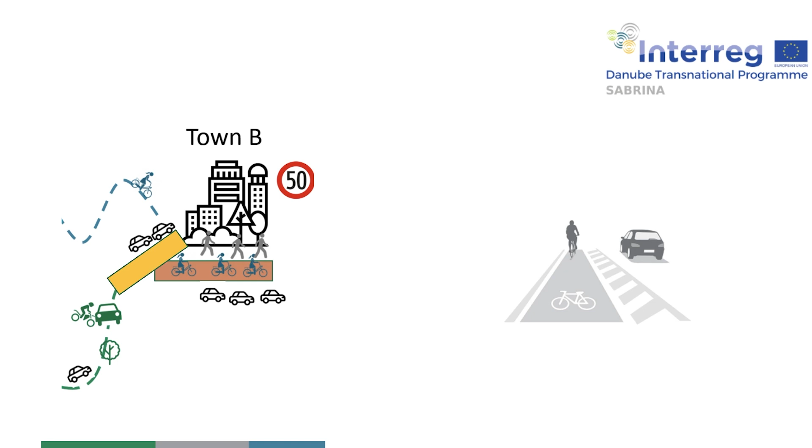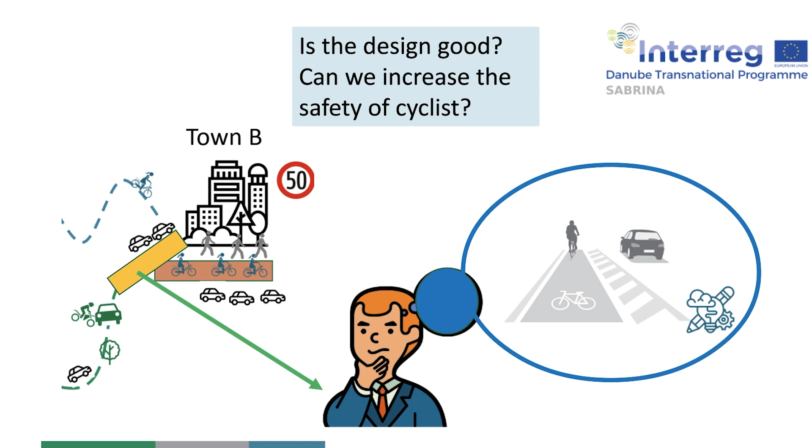We also plan to build here the separated bicycle path, and we have a design for this. And the question is, is this design good? Can we increase the safety of cyclists with this design? So these are very important questions. And to answer them, we have a solution. In SABRINA, in Work Package 3, we have developed a Safer Cycling Routes Toolkit. And here you can see the first page of SCRT online. And here is one of the pages of instructions on how to use this amazing SCRT.

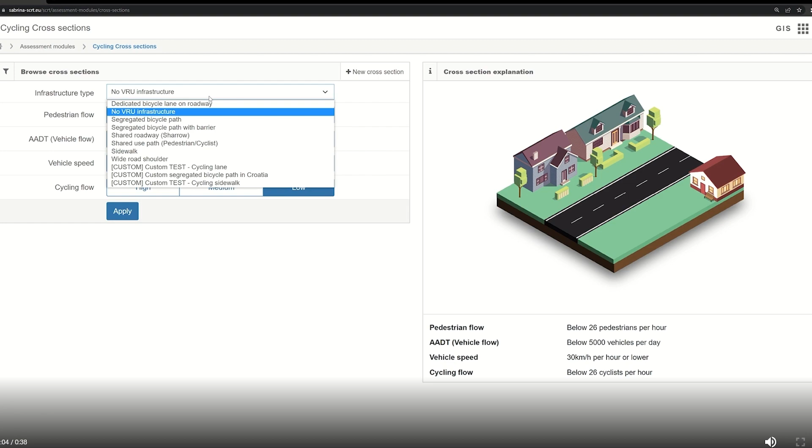The assessment modules are something that you will use when you actually assess your routes, and there are five of these. I will cover them in the order in which you should also use them when you actually try to assess your routes. So the first one is cycling cross sections. Here, if you saw the SABRINA Experience booth over there, you can select some of the infrastructure types which are being assessed by CycleRAP and iRAP methodologies. It's eight of them. You can also define some of your custom cross sections.

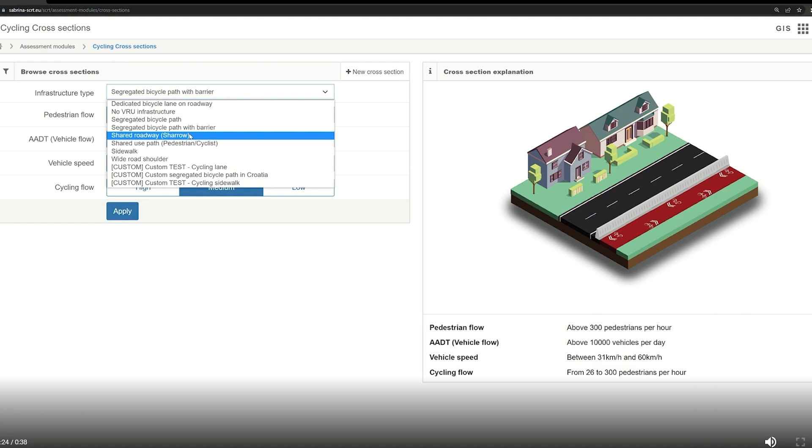You can select the flows that are going to be happening on the infrastructure type that you selected. So pedestrian flows, AADT, which is the average annual daily traffic on the road, and cycling flows. You also select the speed ranges, you click apply, and you get the results. The basic results that you should focus on are, of course, the iRAP star rating and the CycleRAP risk scores, but there are some other things that you can browse through.

So you can also browse the costs, the reduction potential or the crash modification factor that was used for a certain infrastructure, and the safety scores, which is a sum of all accident scores from iRAP and CycleRAP methodologies. Regarding this number, the lower the number, the safer the infrastructure. For example, for this infrastructure here, we have a safety score of 11. That's safe, I would say. You can also see what you actually coded regarding the pedestrian flows, cycling flows, and so on.

What is important here is that when you browse these cross sections, this is actually the repository of all available cross sections that the toolkit uses when you are applying them on your routes. When you create your own here, you are the only one that can actually see it, and it will have a custom prefix. You can edit a lot of parameters.

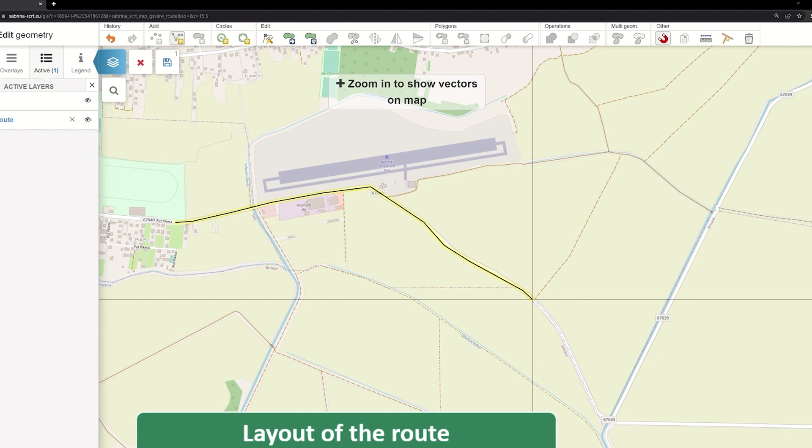Let us move on to the other module that's really important and kind of mandatory if you want to assess your routes, which is the GIS module. Within the GIS module, you need to do three basic things. First, you need to actually draw the route, so you need to make the layout of your route, as you can see in the video. Then you need to split the route every time significant infrastructure or flow changes. For this example route, I have split it three times from the data I had available. No infrastructure change, but some flows did change.

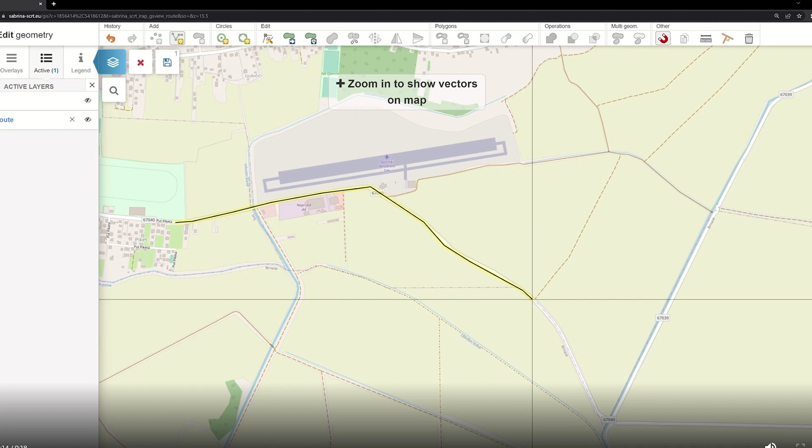And you can also add ECS attributes on the route. You can see me adding, I believe this was a survey point attraction attribute. I wanted to add some cultural heritages, for example, so we can see how it is being assessed later on. This part is optional though, so if you're familiar with the ECS, you can use it and you can get some results on the presence of these attributes on your route later on.

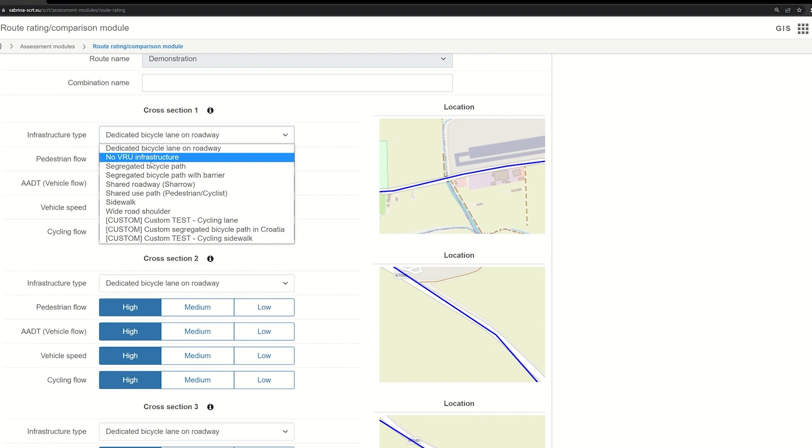This is basically the route rating module. After you select the route that you did, same as within the cycling cross sections, you just add the flows, the infrastructure, and so on. I'm not clicking on it in the demonstration video, but if you click on the i icon over here, you will actually get the image and what has actually been coded within the individual cross-section. You can click apply and save route, which I didn't do here, because if you click view, you can very quickly get the results.

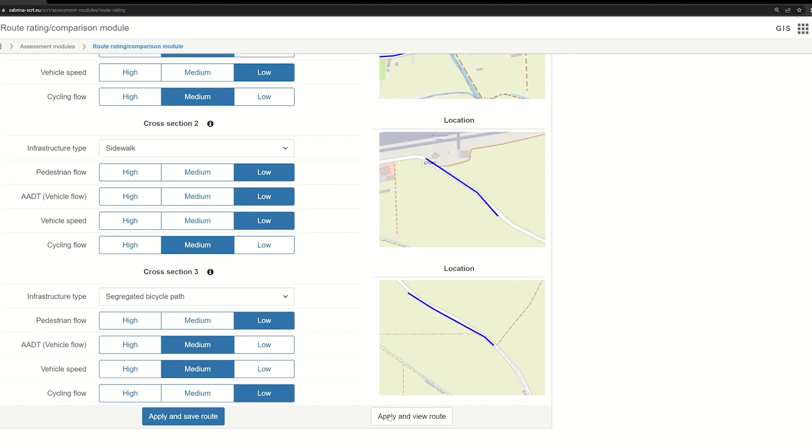So what can we see here? You can see the cost, which is the approximation of the currently coded infrastructure on this road. You can see the average IRAP score estimation for the route. On the route that I defined, you can see that this route has scored 4 stars on 0.9 kilometers, and you can also see that it scored the same percentage on the other 0.9 kilometers. After that, you can go to the CycleRAP score average and see that the medium risk is present on 72% of the route, and the low risk is present on 28% of your route.

You can see some other statistics that you entered during your layout infrastructure defining phase. So you can see for your route where the vehicle flow is present and in what percentages. You can also see any ECS attributes that you coded here. They will just be added dynamically. And you can also see what cross sections have been added in what percentages of the route here. This is basically the results of the route rating module.

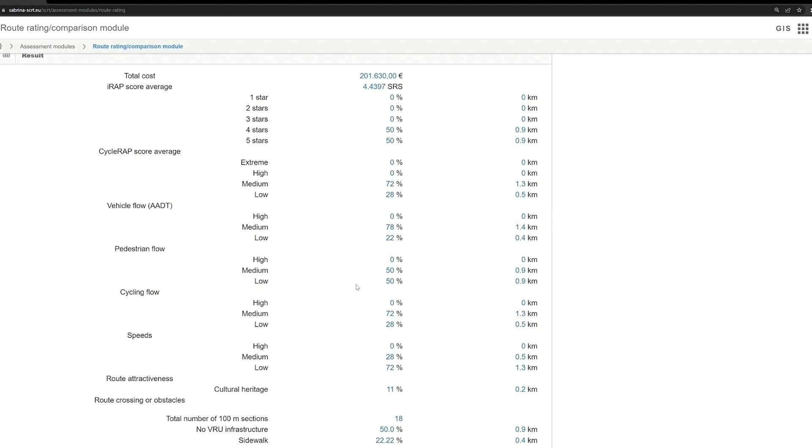You can also compare any of the routes that you save within the module, but just because I don't think there is enough time, I skip that part. So if you're interested in that, you can find me at the SABRINA booth later.

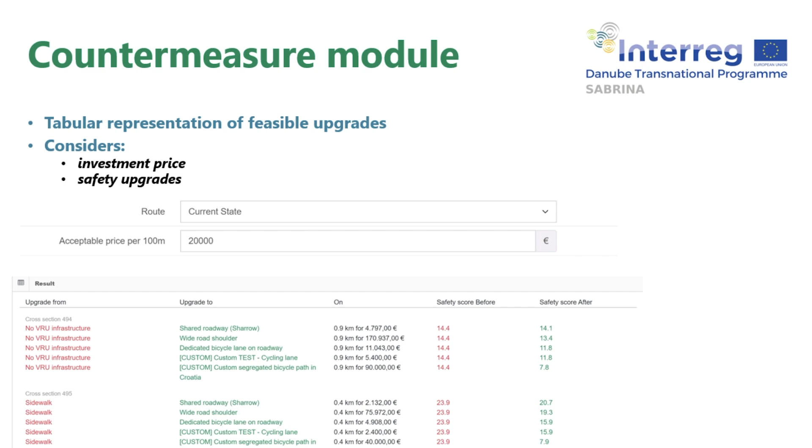Okay, let's go to the other module, which is the countermeasure module. Within this module, the only thing that you need to input on the route that you previously saved is the acceptable price or the investment price. You just need to divide it per 100 meters of your route, and the module will give you a very simple results table of what you can actually build on these cross sections while taking this price into account. And you can see that for my route there are multiple alternatives here.

For the first cross section, which was attributed as no vulnerable road user infrastructure at all, the module has suggested that I build a shared roadway or a sharrow for 4,000 euros or almost 5, a wide road shoulder for this amount, a dedicated bicycle lane on a roadway for this amount, and also my custom cross sections that I defined were taken into account. And you can also see that only the first two cross sections were suggested, because the third one was actually coded as a segregated bicycle path, so the module for this price did not find any viable upgrades.

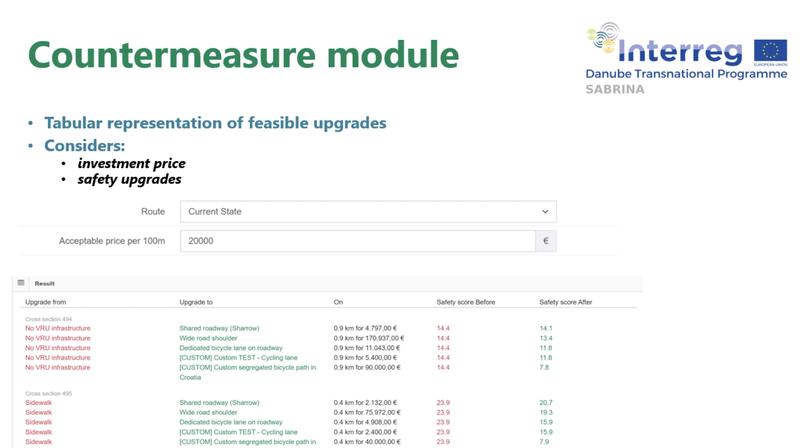You can also define the analysis period of the benefit to cost ratio analysis, and something that IRAP uses is 20 years, so this is a number that we would also recommend that you use. Then you can also add a discount rate.

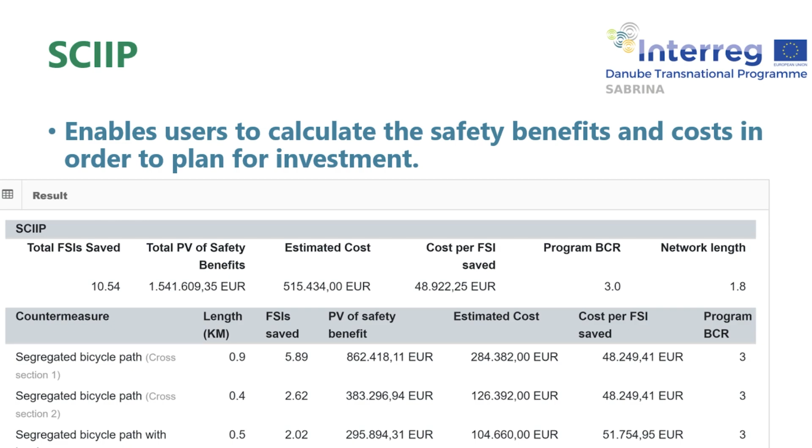Here you can see the benefits for the route. You can see the estimated cost of construction. You can see the cost per each fatal and serious injury that is predicted to be saved. You can see the program benefit to cost ratio, and here you can see the network length. The table below shows this only by each cross section that is being assessed within the module. So quite handy.

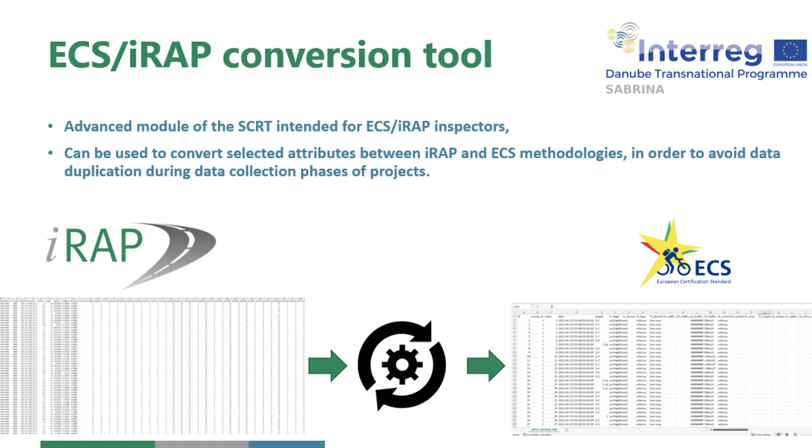And let's move on to the last part of the tool, which is a conversion tool, iRAP to ECS conversion tool, to be more precise. So this is an advanced module of our toolkit, and it is intended for trained ECS or iRAP inspectors. You use this tool to convert selected attributes between iRAP and ECS methodologies. So when you are assessing both, you use this tool to avoid data duplication. So you do not need to check for AADTs and some other stuff 2 times. It will just be entered automatically for you within the tool. And this is what our tool is all about.

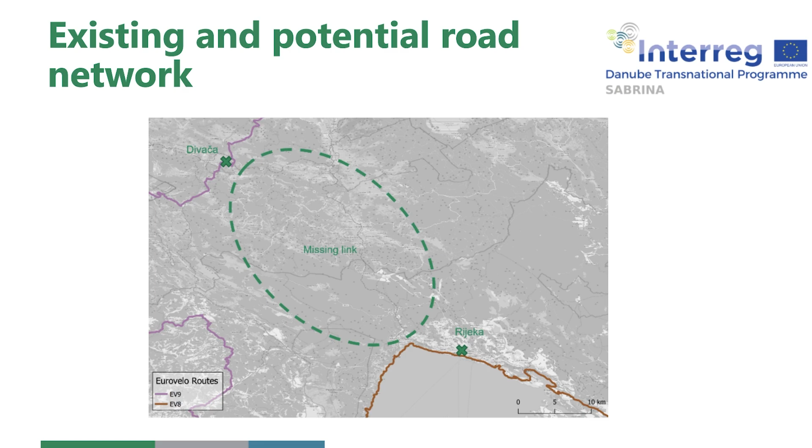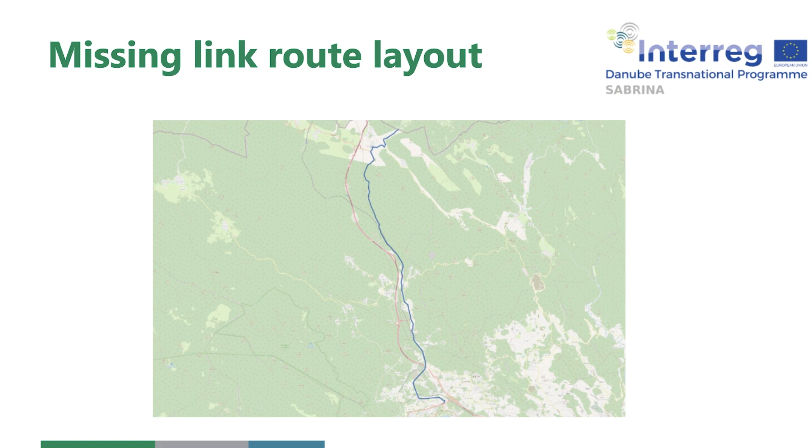He said that every 2 years the routes are being redrawn. So one of the options was also to connect Matulji and Divača in order not to force cyclists to do the entire trip around the Istrian peninsula and take the EuroVelo 8 route. So basically this is the route layout. It's a state road which is right in parallel to a motorway. It's about 17 kilometers in length.

The data collection process was quite straightforward, so we contacted the Ministry of Interior for the accident database. There were no cycling-related fatalities reported, fortunately. We also collected traffic flows and speed data. Croatian Roads make a publication every year where they summarize the ADT data.

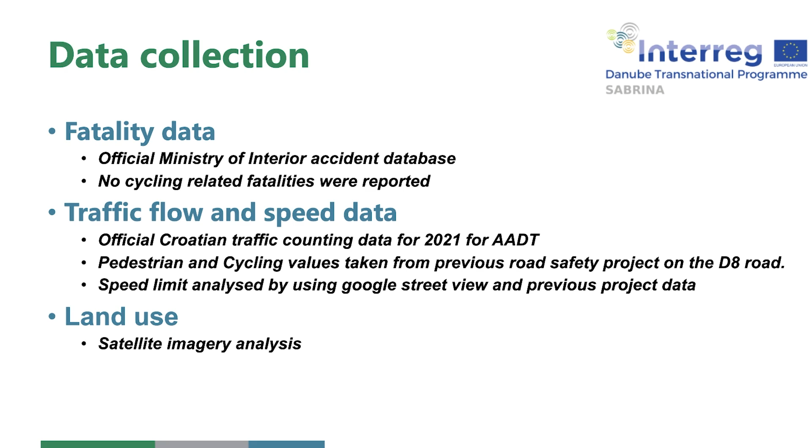And fortunately, we had a previous project on the D8 road from where we could also gather the ADT data. For land use, we used satellite image analysis, and then we identified which parts are rural and which are in the settlement. Here you can see the current situation of the road. So the average ADT for the road is 7,293. The average peak pedestrian flow is 82 pedestrians per hour in settlements, and the average peak cyclist flow is 25 per hour as well along the route.

Land use is mostly in the undeveloped areas because there are only, I think, 2 settlements from Matulji up to the border, and the rest is then rural. So, how we did it? We had to draw the route, and this could be a meticulous task if you wish to do it so, but you can also be quite rough to do a faster analysis. So, you draw the line along the road, and then you split the route every time some of the parameters change, like the speed, the ADT, the land use, or anything else.

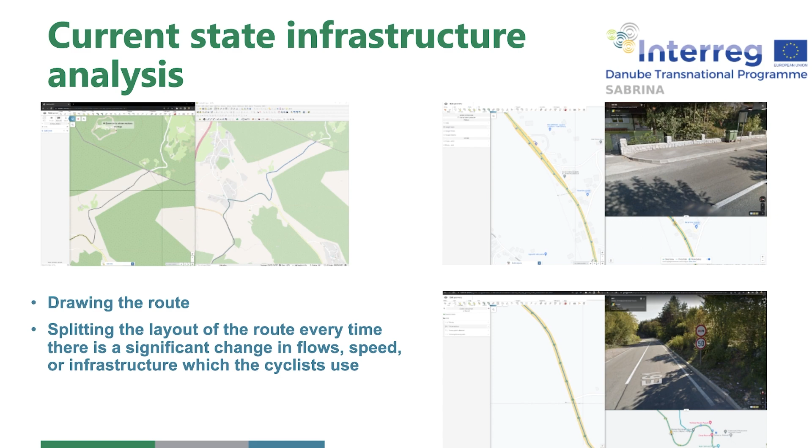After that, you have to go to the cross-section module, and on the split sections, you have to assign the closest cross-section that resembles your current on-site situation. For that, you can use Street View, you can do video recordings, and then you do it for all the sections. After that, you proceed to the coding. You assign the low, medium, and high values to every cross-section, and after that, you can get, of course, the result of the current situation.

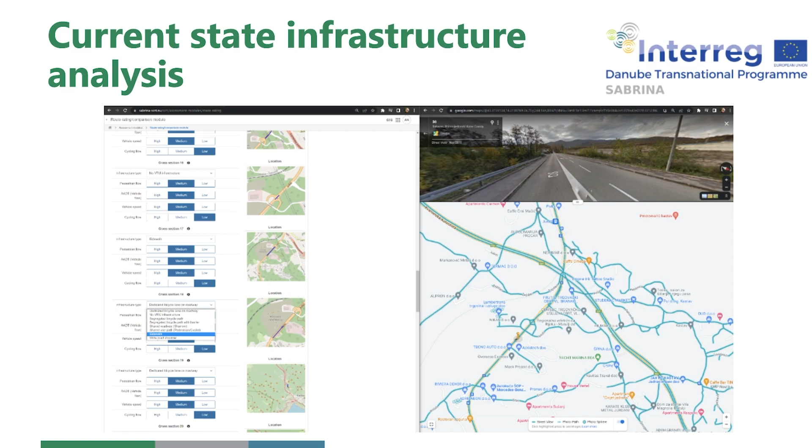As the current layout, it has mostly, and unfortunately, a two-star rating, with a smaller section being 1 star, and according to the CycleRAP, it's rated as extreme risk across the entire road section. The vehicle flow here is high on 93% of the segments, and it's low on 7% of the segments. What can we do now?

So we can of course set an amount that is acceptable to us, according to which we want to promote some countermeasures. And then the tool can calculate, based on the current situation, what could be an improvement measure. Here, for every section, the tool proposed around 4 countermeasures that could increase the safety, and for that you have to pick one that could suit your needs. After that, when we pick them, here is the final result for our 15 sections. Mostly we selected to add a dedicated cycling lane or a shared roadway. Those were the 2 countermeasures that suit us the most.

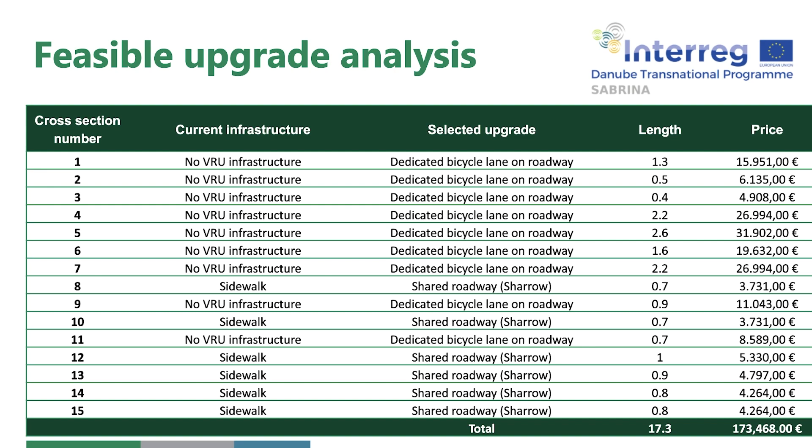The total investment for that route would be 173,000 euros, and in total it would propose an upgrade of only, unfortunately, 7%. Because the road layout is quite tricky to tackle with the proposed countermeasures and the proposed budget, the alternative routes should also be considered, where speeds and vehicle flows are lower, or we can, of course, expand the investment range to enable the inclusion of road safety barriers. And that would be all for the Croatian pilot.

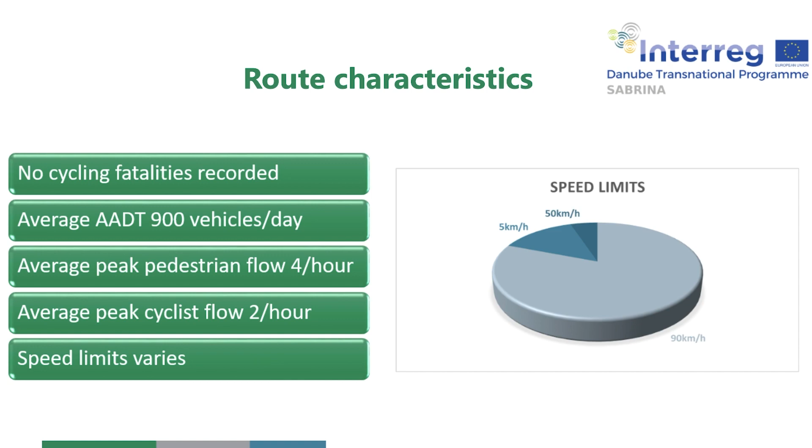After analyzing the data, we drew the route using the instruction manual, and here I want to say a big thank you to the developers, because it is indeed very easy and accessible, even for a beginner. I'm not an engineer at all, I just read it and did this analysis. We drew this route, and as you can see, this side-by-side view mode is very useful, as you can see the geography, and it's easier to design, to draw, even if you have never seen this road at all.

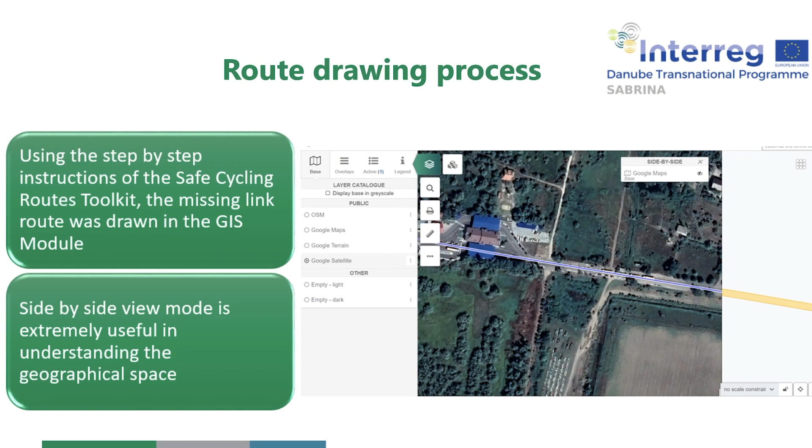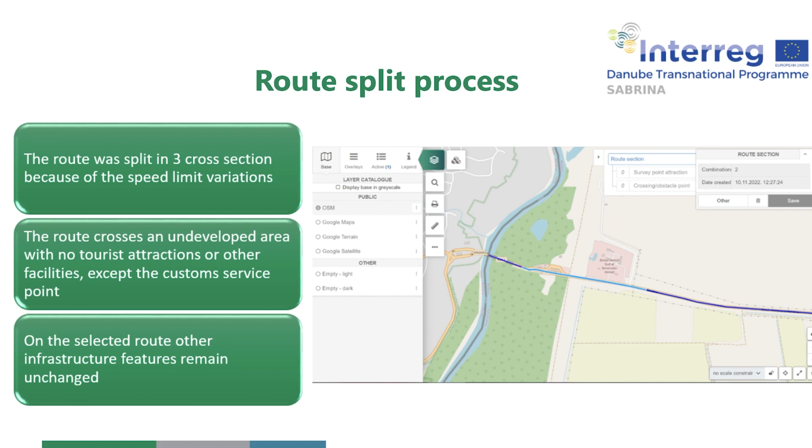After this, we split the route into 3 cross sections. Why 3? Because of the differences in speed limits for that part of the road. For each cross section, we introduced the features. The features are the same for all cross sections, so we have no vulnerable road users infrastructure at all. We have only fluctuations in speed, like I mentioned, and we introduced, as you see, low, medium, the main characteristics, and we obtained the results.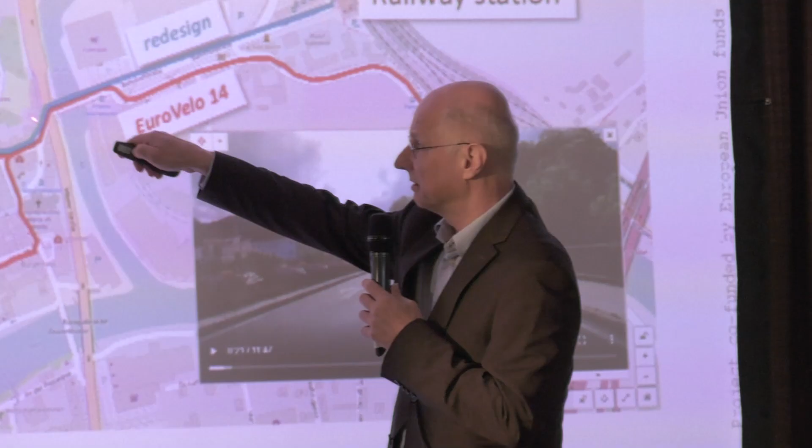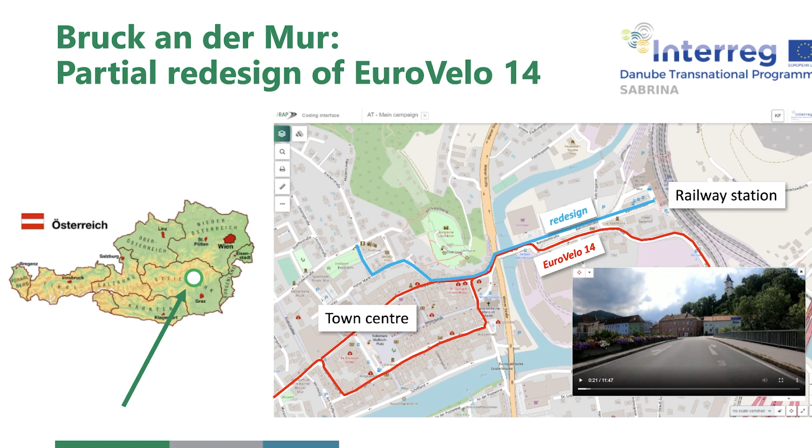The existing layout of this here is, well, no cycling infrastructure. There's just a little, like a 20 meters shared cycling pedestrian path. Otherwise, there is no specific cycling facility in the before situation. So what we did was, as Andelo just outlined, to digitize the new route in our GIS module in the software, in the SCRT module.

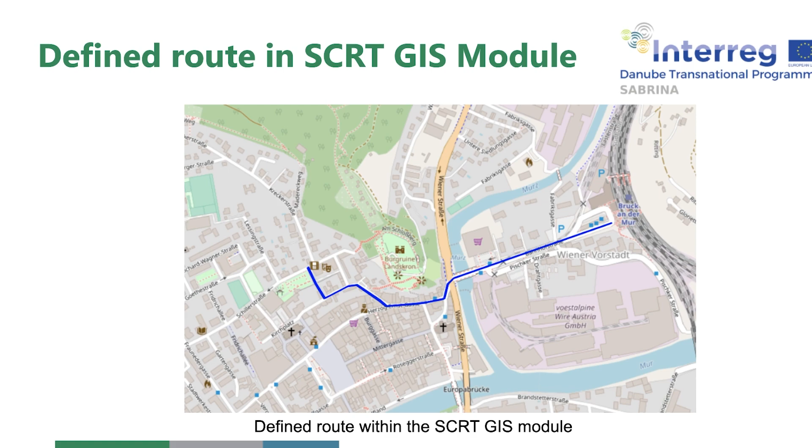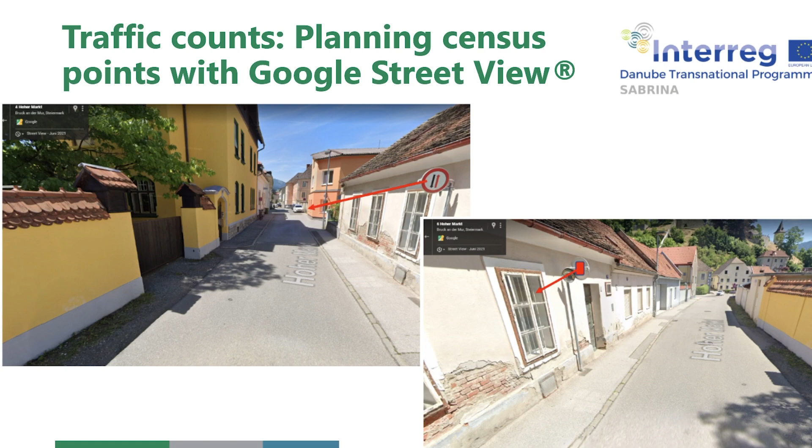Right, and then we started gathering traffic flow data. So how do you start out getting flow data where there is no database available? The city does not have anything on flows, neither vehicle flows, cycling flows, pedestrian flows. So what we did is go to Google Street View and check for poles where we could fix the cameras. Our colleagues at the Austrian Road Safety Board nowadays do these traffic census with little cameras mounted on poles, traffic signs, wherever, for a day or so. And then there's a post-processing, analyzing the videos and doing the countings of vehicles, of pedestrians, of cyclists.

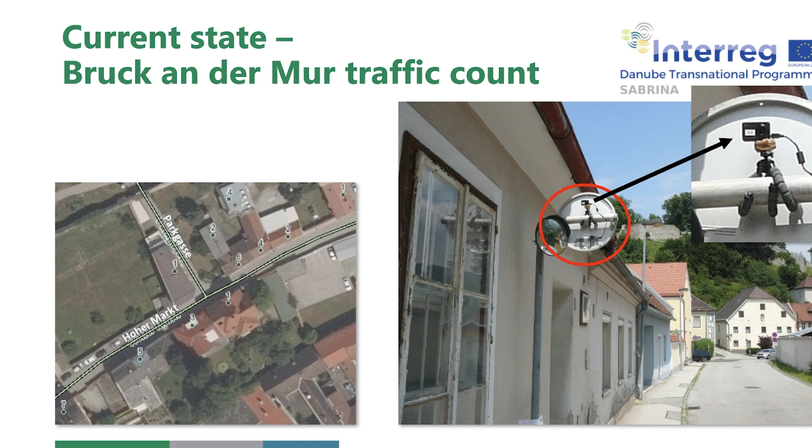That's what we did. By the way, you see, this is a minor road network, no high traffic flows, nowhere in the city. And I forgot to mention, there is a general 30 kilometer per hour limit, except main roads. Right, so this is close to the railway station. Here's another camera mounted to do the census.

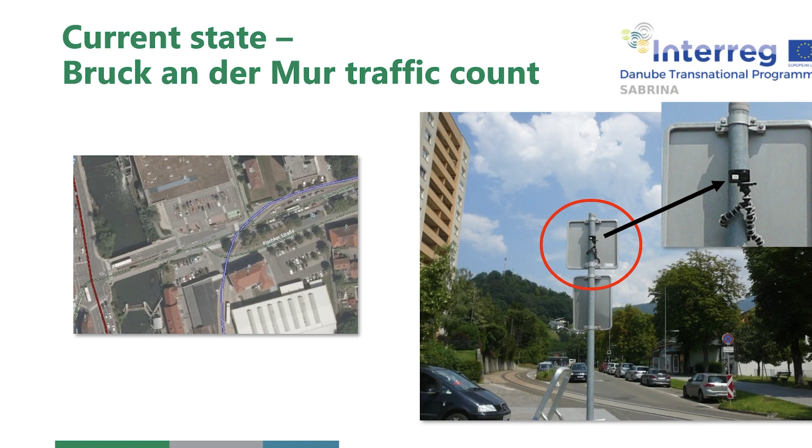Right, and then we went directly into the comparison module to compare the current situation with the design plans which only exist on paper. I'm coming to that in a second. So we went to this comparison module. And before that we entered all these data, traffic counts and AADT, everything that Andelo just mentioned that you need for the system to work properly.

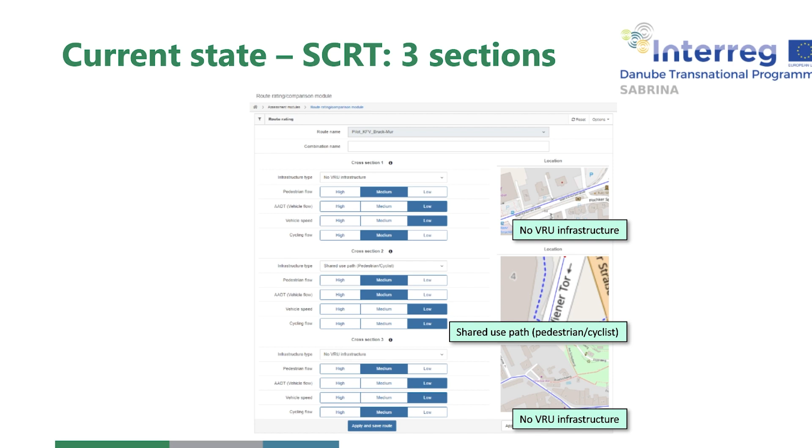Right. In the before situation, as I just mentioned, there is just a 20 meters shared use path, but otherwise there is no vulnerable road users infrastructure. And nearly all these values of flows and speed levels are low. Just to mention that because I'm coming back to that at the end of the presentation. This has some substantial impact on the results of this pilot. So 3 different sections in the before situation, and this is the part of the afterwards. This is the design we received from our colleagues.

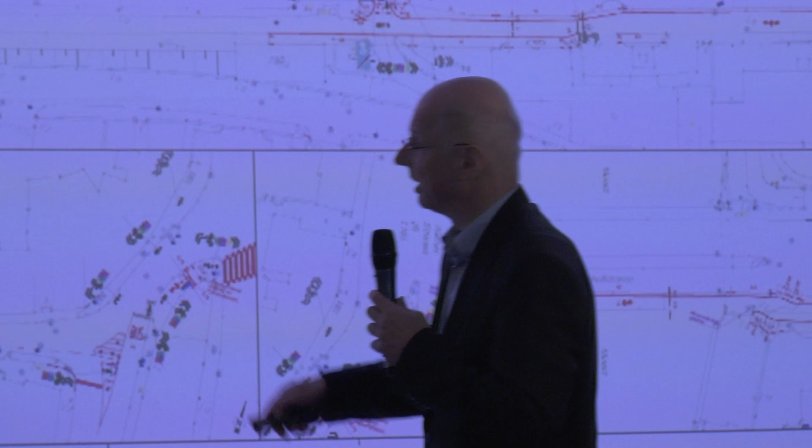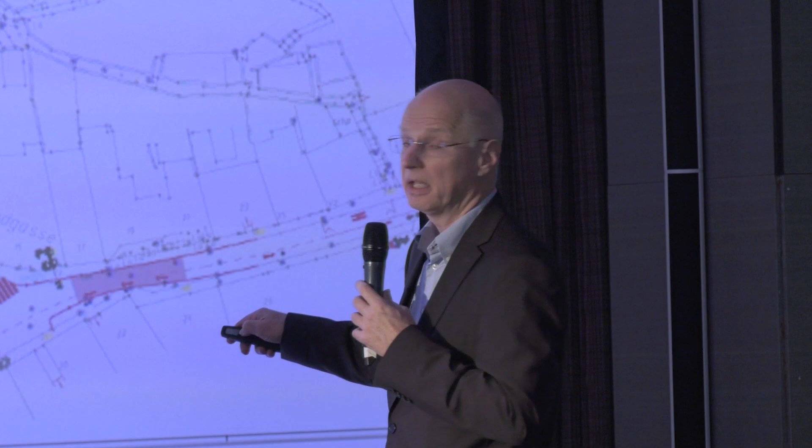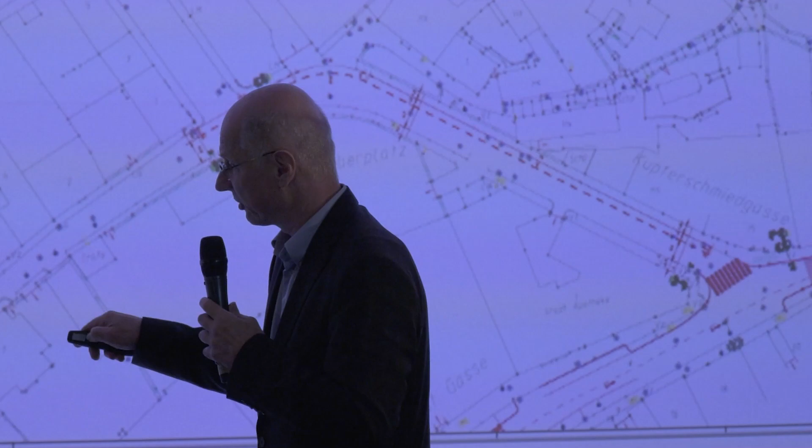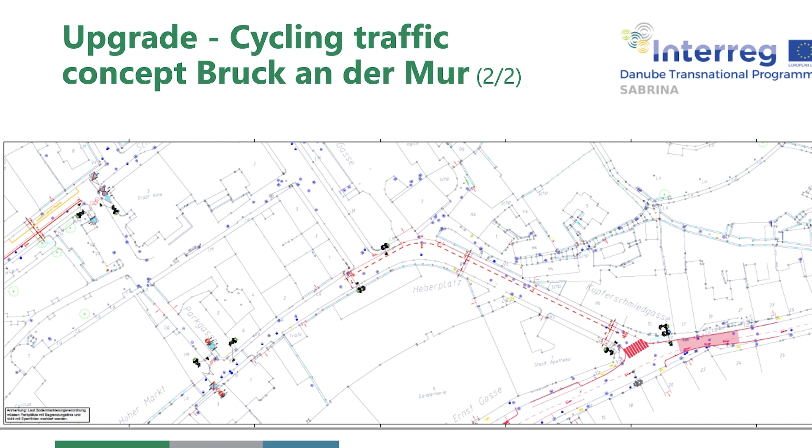No vulnerable road users design here, but here we have a contraflow cycle lane in a one-way, so that's completely new. Then again, no cycling infrastructure, and that's a cycle street. So that's where only cyclists are allowed and some cars, residents predominantly, at low speeds. That makes 6 sections now. I don't repeat everything coming from the railway station, ending up somewhere here in the center of town.

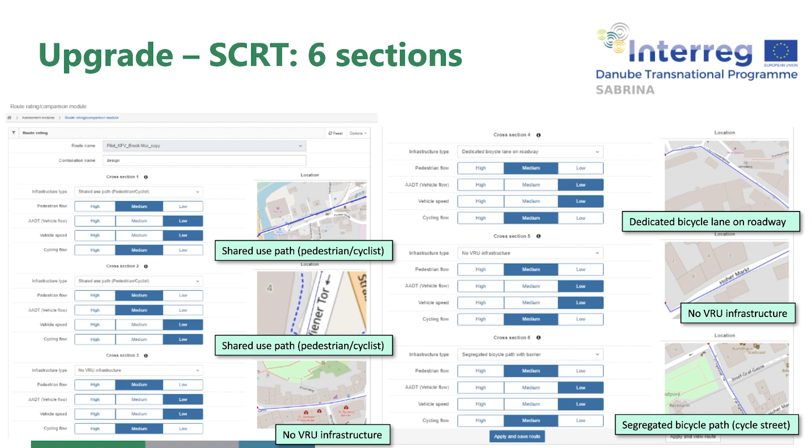Right, and for the comparison between the two, I don't even try to explain these little figures to you. The interesting thing is that there is no big difference between the current situation and the situation in the design because of the low speeds and the low traffic flows. So this may be one of the central messages of that tool, of the evidence provided by this tool.

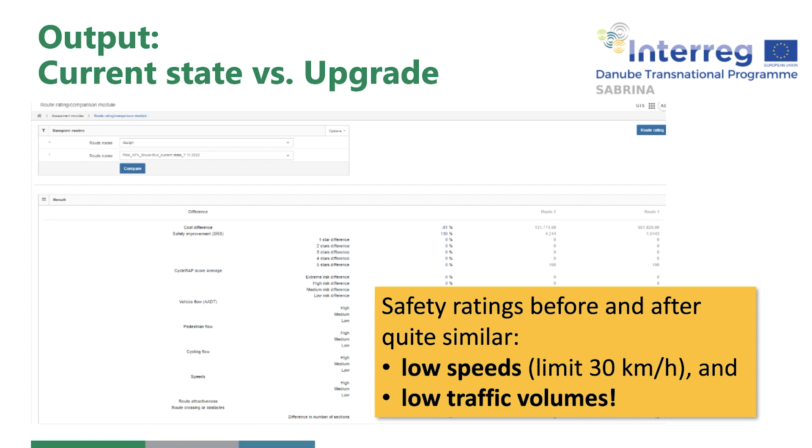And that evidence is you can do new cycling infrastructure, which certainly costs you some money and brings definitely some additional comfort to cyclists. But if you don't have the money, and if you have the option of lowering the speed limits and providing a low speed level, you will end up at similar ratings when it comes to safety.